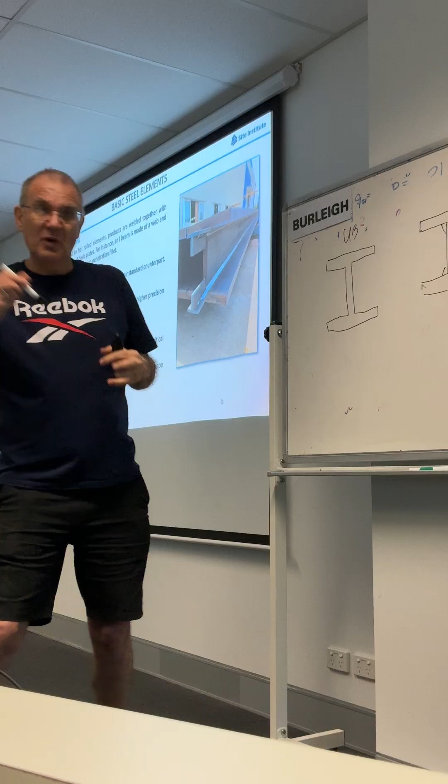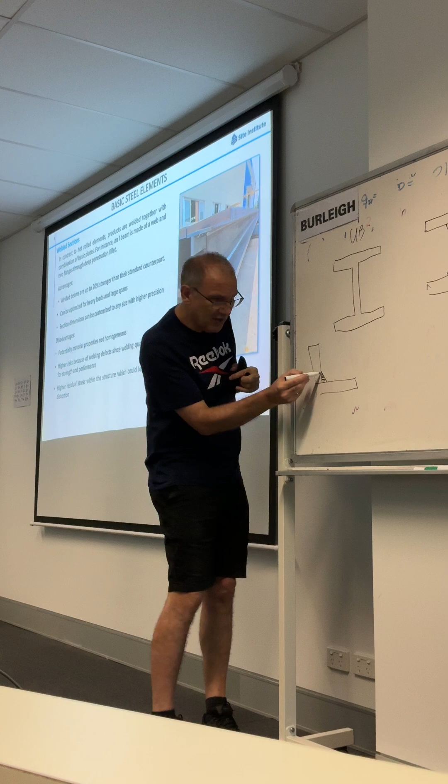So welding is a process. I think you spoke about that with Matthew briefly, I'm pretty sure you did. It is simply: you have one plate here, another one here. Now you heat it up and then you add material, fillet, they call it fillet, for instance the fillet weld. Because of the thermal process, they will actually fuse together. In other words, you add additional material and this becomes fused, and fused means they cannot separate anymore, except by cutting it.

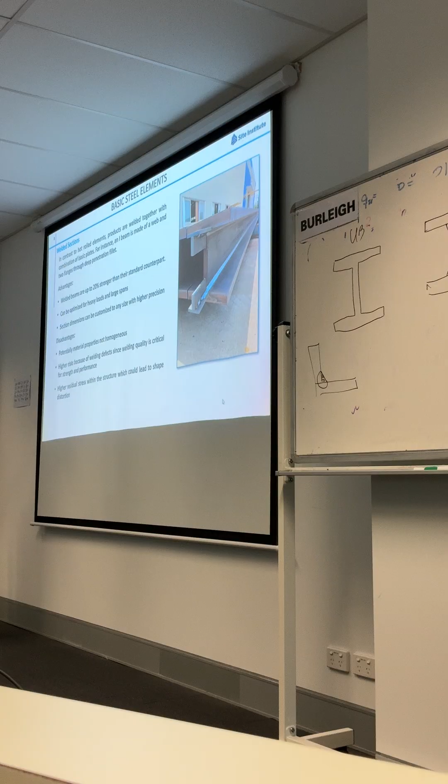So welding is really a very laborious, very challenging process, but the reward you get is higher performance. And of course, you do this with machines now - I wouldn't do this manually anymore. But if you want to earn a shitload of money, become a boiler maker - the good ones get $500,000, I think. But the point is this is a laborious job, and I think you won't make it for 30 years; you're going to die before that, because of the fumes. It's a very challenging environment.

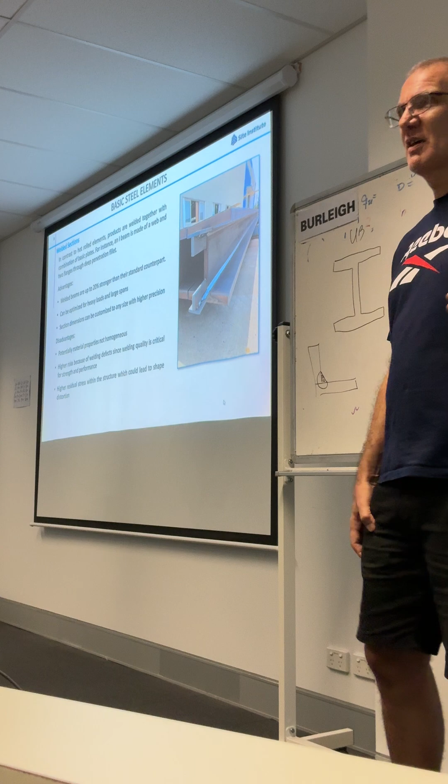But those people in the mines or so, they make an amazing amount of money. Not everybody can do this - it's physically demanding. But I think there's a shortage of welders in particular.

All right, that's all I want to say about that - so we have two different types, but that's the only difference: welded beam, universal beam, universal column, welded columns. So these two we have to consider, and that makes a difference here for you guys as well. Please notice the difference.

Physical properties of steel - you know some of those. We talked about at least the elasticity module, E steel. Remember we used that for instance for the rebars, for the tensile strength and how to calculate the stress, and it was 200,000. So there's no changes here.

There's another one which is called the shear modulus - you need that too when we do calculations. That's why I bring it up here, because all these things are needed. Actually only those two, the rest is... so these two definitely, but I will come back to this point. Poisson's ratio - anyone remember what Poisson's ratio is? Probably not. And the density - that means 1 ton of steel, or 1 cubic meter of steel, weighs around about 8,000 kilograms, 8 tons. So again, we need this, and to some extent this.

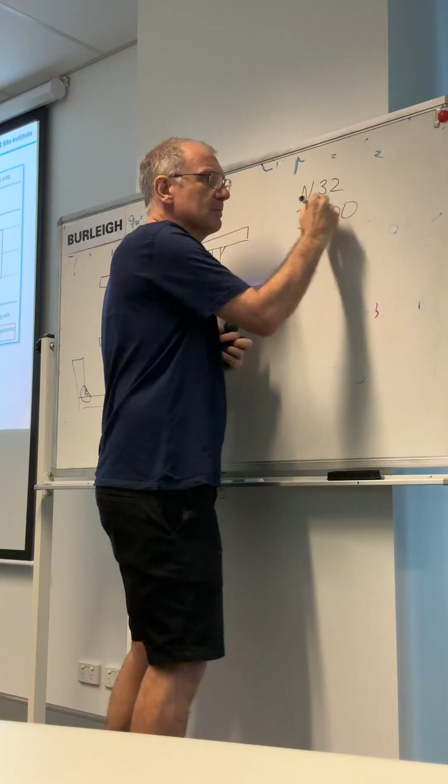Remember when we had our rebar? Our rebar was, for instance, N32, right? And it was made of a steel D500. This was another way to describe a grade. That means that steel rebar has this class D or grade D500, and that corresponded to 500 megapascal tensile stress. So that was here, 500 MPa, because this one was the diameter.

So now there's something different meaning here. So when you see, for instance, a steel grade of 300, when you look at this, it doesn't actually mean now that this 300 is the tensile strength. For instance, that steel grade 300 says the yield stress is, for that particular one, 300, but for some others it is not. And the tensile strength is completely different.

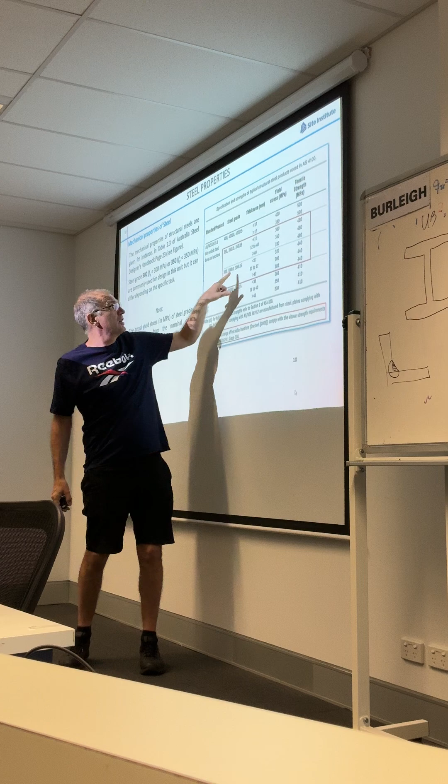So that 300 still partially corresponds to the yield strength. That's the same as here, because that's the yield strength. But yield strength means when it becomes too much to tense. But you can see here the tensile strength is now different. So you have to be very careful with the interpretation. Steel grade doesn't automatically mean it is the tensile strength, for instance.

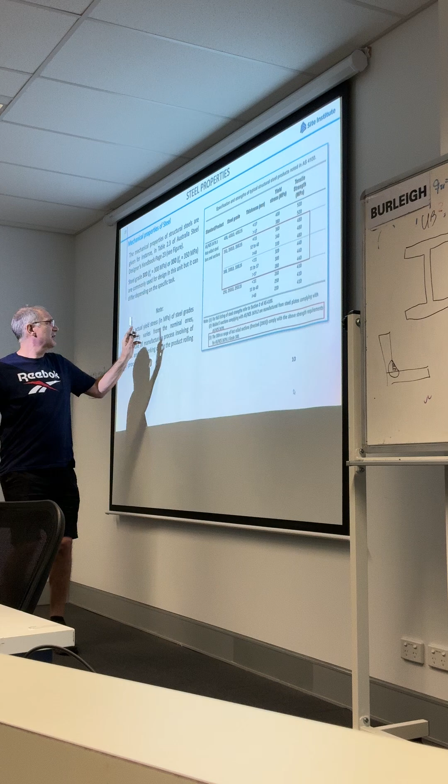So I just wanted to bring it up here, that's when the actual yield stress of steel grades varies from the nominal ones. That's basically this one here, that's the nominal. We say steel grade 300, that means the yield stress would be around 300. But it can vary, and that's what you see here. Because when you look at the different thicknesses, then you can see it can vary. Which means you must be careful, you must read the tables to find the right yield stress.

But again, for us, we will see when you look at the steel catalog, it will mostly be the same. But again, you must read the tables carefully. And I've also highlighted down here the fact that you see the grade, steel grade 300, a steel grade LO, and so on. There's 400 here, and there are more. When you look into the catalog, there are much more.

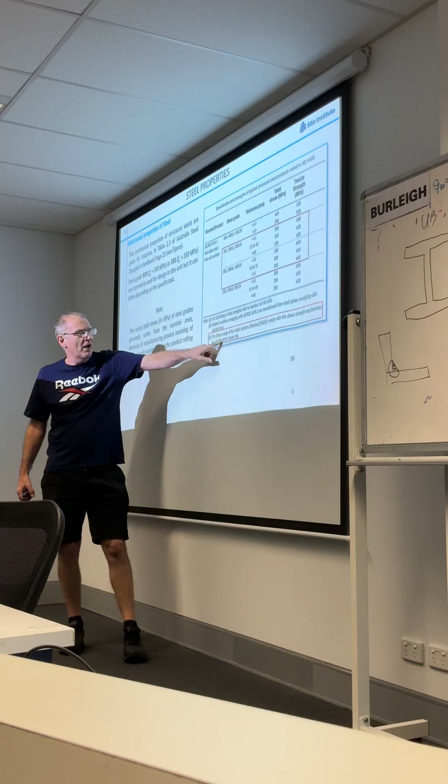Just simply, steel grade is some sort of an identifier, a label. It generally corresponds, that number, to the yield strength, but definitely not to the tensile strength, which means you have to check the catalog for the right numbers. And you will see they are different.

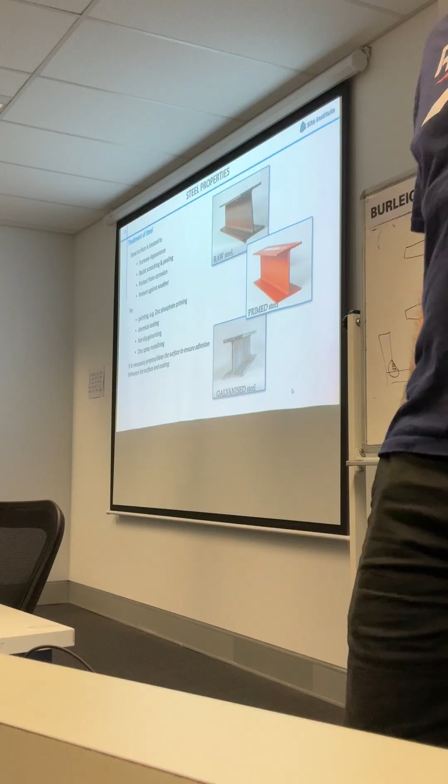This one is relevant for your project. When you talk about, basically when you have wrapped up your design and come up with the technical drawing, and then you have to hand over your solution to the clients, there you have to discuss briefly methods of corrosion protection, prevention of corrosion. So you have to simply write a few sentences about what do you think is the best way to make it corrosion safe. And here this is actually the PowerPoint presentation which I created, where I rummaged around the internet to find some strategies.

So that steel is normally like this, that's actually when it comes. You see, it's rusty, it's dirty, it's corroded, right? Simply because the surface is interacting with the environment, moisture. And that's rust, if you just go over that.

So in order to make that nicer, especially when it is exposed to the environment - if that would be within the concrete, then I couldn't give a shit how it looks like. The only thing is to make sure that it doesn't corrode further. But when it comes to beautification, that doesn't look nice, which means you want to appeal to the beautification of this one.

So you coat it, for instance. You can actually use this one, you basically prime, you paint it. This one is a paint which basically also serves as rust protection. When you go to Bunnings, when you paint stuff for steel, it's the same thing. So you basically create those layers, and then it is, A, much more appealing, and B, protected against corrosion.

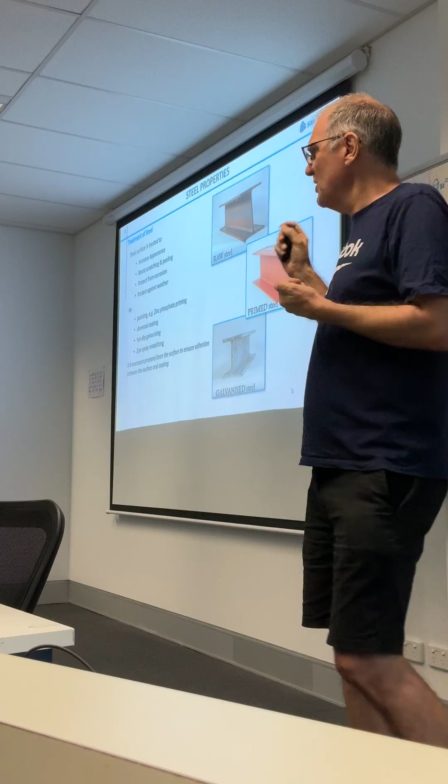That is the cheapest solution, of course, but as you can imagine, you have to repeat the coating every few years. They have to come on and paint over it. You've probably seen those guys on the Golden Gate Bridge in San Francisco. You know why it's red? It's because it's coated. And every year, I think, they have to climb up these ones and paint the whole stuff. Every year.

Simply because San Francisco is on the bay, it is exposed to fog, moist air, and salt, which means the paint they have doesn't last longer than, I do not know what intervals they have. I saw a documentary, they really have to paint it anew at a particular interval. Which means it's a lot of manpower to actually get it painted.

Because when was the Golden Gate Bridge built? I do not know, in the 30s, 40s? Not sure. Back then they used simply steel cable and steel, and they didn't have any galvanized things, right? As far as I remember. So they couldn't replace it, or don't replace it, so they have to paint it. And I think with all kinds of suspension bridges, you have the same issue where you have to paint it just to protect it, right?

And the last one is here, galvanized. This can only be done when you actually make these things, when you manufacture those steels, because that requires chemistry and also electricity, because that's actually then using an electrochemical process. But of course, once you have done that, that's actually this coating, right? Once it's done, that lasted for, I do not know, not eternity, but at least for many, many years.

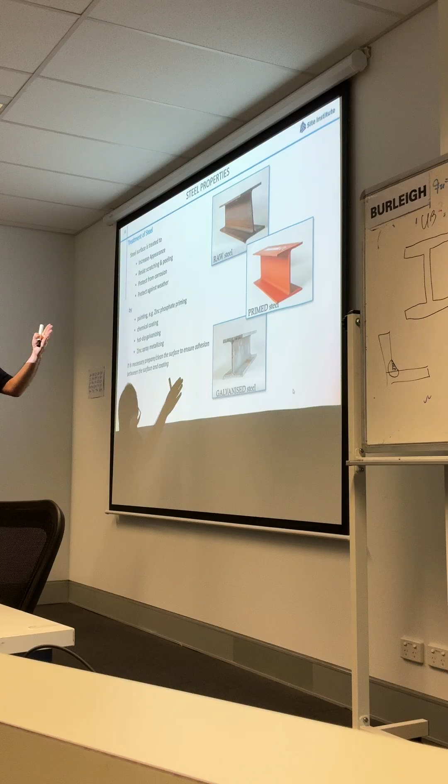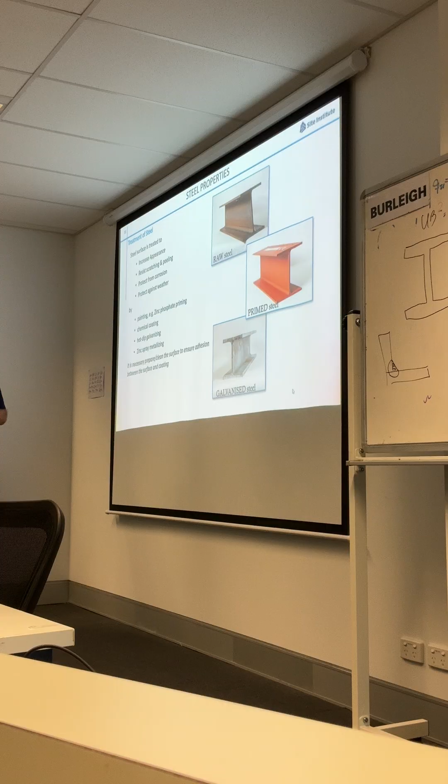Because what you have, you simply have the zinc, and zinc is in particular the one which is corrosive prevention, that actually simply deposits on the surface, on every single area, and gives a coating on it, which is, I don't know how deep it is, and it sticks there. It's really like penetrating into the skin. You can also spray this one, but that's a different story.

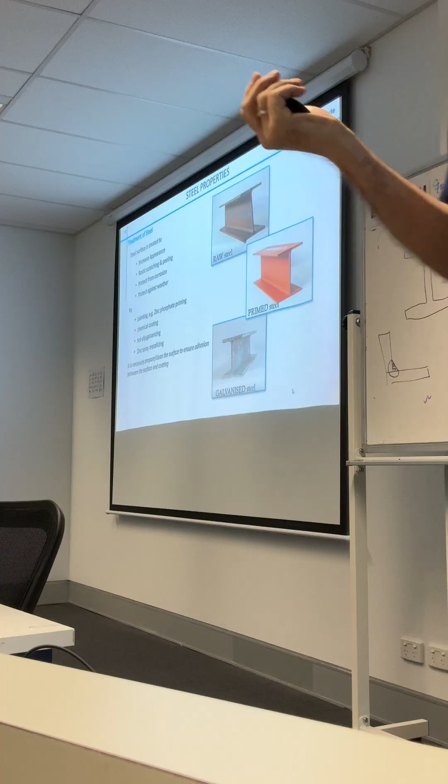So this is here for you. When you have to discuss your final handover, this is one of the ideas which you probably can check, and then Google a little bit how much it costs. It's not that expensive, and then you should be doing it. That's why I bring it up here, for no other reason.

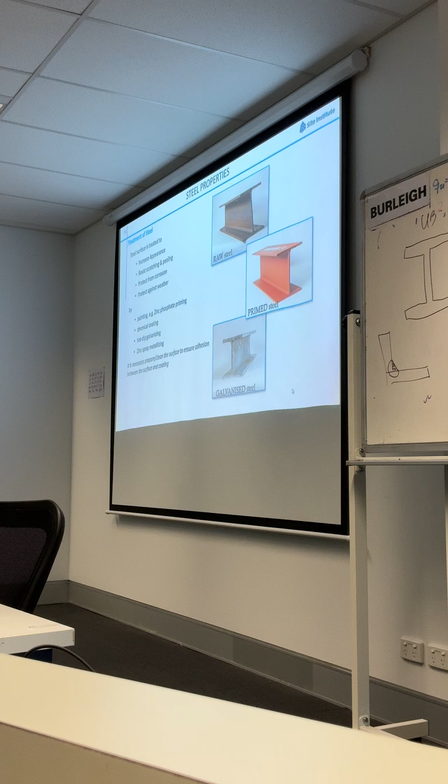So this one we do not have to discuss anymore. We talked about this capacity reduction factor, the phi. For steel, we will get another one. Concrete column, what was it, anyone? Concrete beam, what was the reduction factor? You submitted yesterday, what's... 0.8. What was it for the column? 0.6. 0.6, yep. What was it for the foundation? 0.7. And now for steel, it is going to be 0.9.

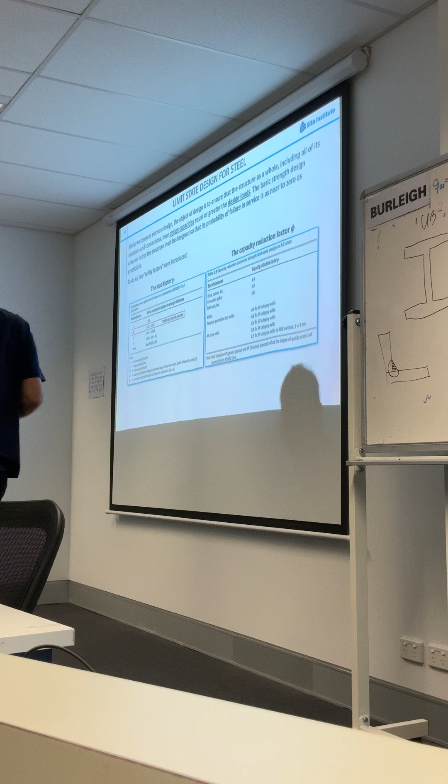0.9, and it's going to be 0.9 for the beam and the column. That makes our job even more easy, because you have to remember only this: 0.6, 7, 8, 9. Easy to remember, right? So that is actually why I put it up here, because that's the one which we are going to use next week when I introduce to you the steel beam design and the column design. Load factor again—we talked about this already, we're going to use this again, pretty much exactly the same thing as we did with the concrete beam and the concrete column.

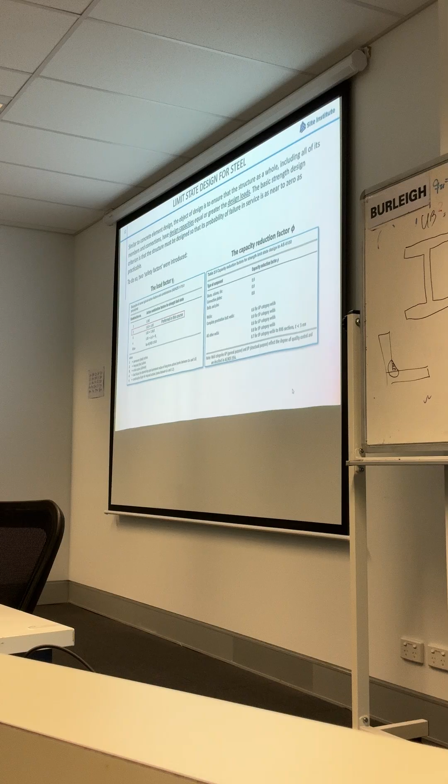And with that, that was all I want to say in quick run about steel. I will recap next week when we talk about this in my PowerPoint presentation. I will actually recap some of the information. But steel grade—this steel grade is a very critical issue. I know that people actually make a mistake there, and next week I will introduce it again, just to make sure that this is very clear between the steel grade and the actual strength.

That is this. Since everybody's mind is at the moment at the column, right? Yeah, no, that's okay. That's fine. I can live with that. Right?

The point is actually, it was open for 2 weeks, right? At least the theoretical stuff should have been done previously. The only thing you need to do today, supposed to do, is actually the SPACE GASS, right? Because that's the only thing which is missing for your submission, right? So since I showed it last week, but I'm pretty sure half the people were not there—I mean, they were here in spirit only, but not listening—so I just want to quickly go through it. Not go through the entire thing, I will only show you 2 things which are important for the column, right? So I do this right now, so that after this, I'm finished with my part, and then you continue with your stuff.

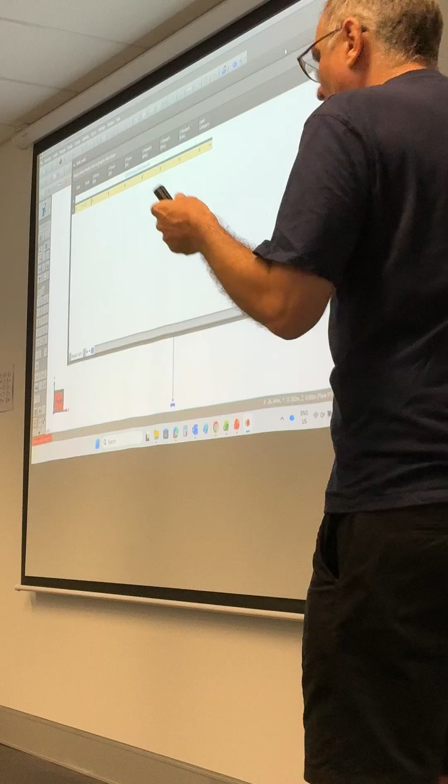So what load do we have? We have a node load, and in which direction does it go? So what load would you choose - an X load, a Y load, or a Z load? Y, it's a Y load, of course. And of course it is negative, because it goes down. Axial load goes down. So we write down here, this will be minus whatever the load was, say 1000 kilonewton. And that is actually a Y load, because it goes down.

Okay, give me one second, because I just want to grab something.